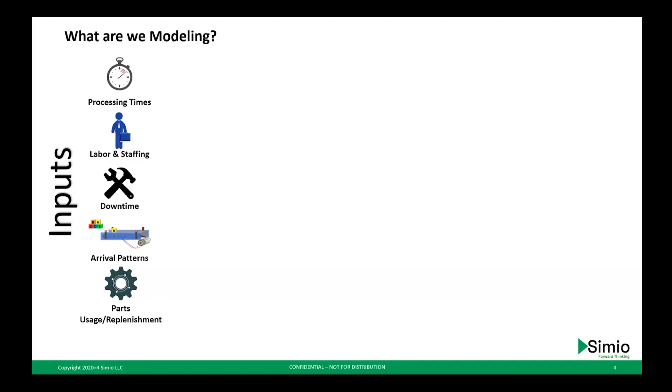And how is that demand coming into our system? We'll see the arrival patterns. We're also going to focus on processing times, and kind of the piece in between there is routing. How do these products move through the system when they get to equipment or resources? How long are their cycles?

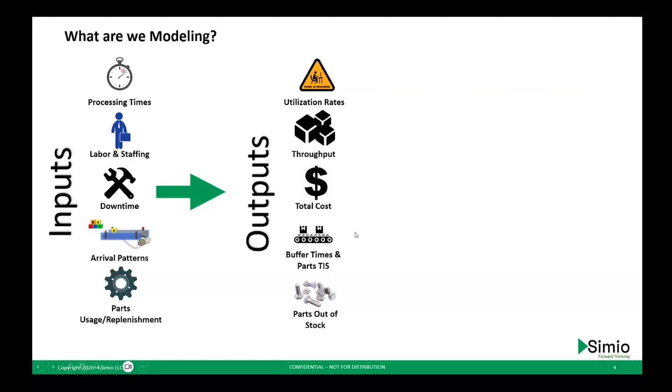Outputs. It's important to work with your stakeholders and understand what are the business KPIs that we want to measure in the model. Sometimes these can get confusing. Sometimes people will think about throughput as an input because you do have input rates of materials coming into the system, but throughput is going to be an output that we measure in the model. So how much did I make over time as finished goods or finished products? We're also going to focus on buffer times and parts, TIS or time in system, really just for some verification and validation.

In parts 2 and 3, we'll focus more on the analytical aspects of simulation. Then there's a validation piece in between here. We'll see that a little bit on the next slide, but this is more like trying to improve the process, using the model for experimentation, scenario comparison, and process changes to see if we can improve performance, alleviate bottlenecks, etc.

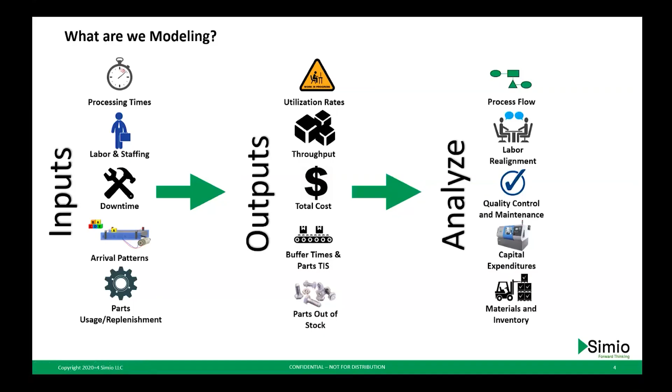From a project management standpoint, this is a recommended timeline of steps you might follow. I won't belabor this too much since I've alluded to some of it, but the first step is clearly identifying what are the business questions you hope to answer. Do you have problems with inventory, labor? These can be qualitative in nature, so you're working with stakeholders or SMEs to understand their pain points and gaps in understanding or grasp of the process.

Then we'll work toward a baseline model of the current state. Generally, unless it's a greenfield or a totally new system, you're going to model the current state. That exercise includes thinking about how much detail you need in that model, which should really be driven by the business questions.

Some of that comes with experience, but one way to think of it, and some may disagree with me, but this has been my experience doing this for about 5 or 6 years, is I tend to start with less detail and get some volume going through the model, just so I can start to gauge the result. So if I start with a pretty low amount of detail, I'm looking at throughput, and my throughput is way higher than the actual system, I've probably under-constrained my model. Then I can look at it piece by piece and think about where I left something out that in the real system is slowing us down. But starting with less detail allows you to get it built up faster and get on towards validation and decide iteratively where you might need to add details.

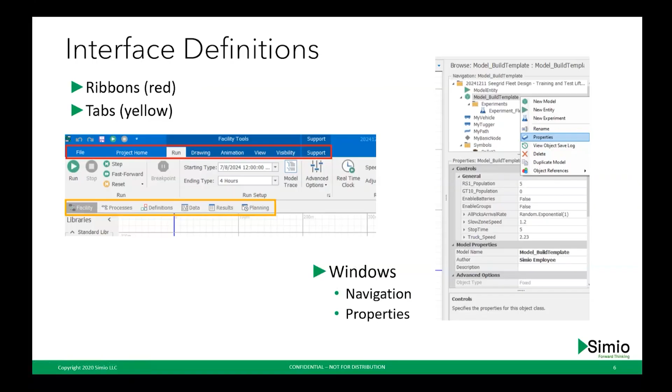So let's take a quick look here. We're now in Simio software, and you'll see exactly what I had on the slide. There are a number of ribbons across the top, and we'll introduce the functionality of some of these today, and likely all of them by the time we get through the three-part series.

We'll also work through 4 out of 5 of the tabs today. Processes will be covered in one of the follow-up sessions. Then we think about the windows on the left-hand side, my libraries. We're going to focus on the standard library of objects today, navigation window here on the right, and properties window also here on the right.

Another good habit to get into with Simio is to hover on things like the server object, or click on a property. Our developers have done a wonderful job trying to give you tool tips, a quick indication of what that thing might do, or a quick description.

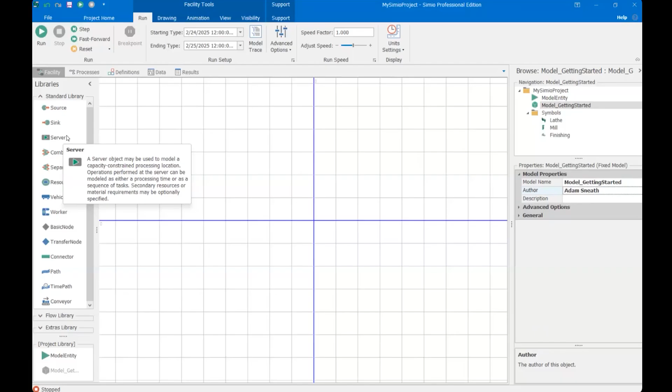So we're going to jump back quickly to the PowerPoint and set up what we're going to build here as our example. Thinking about that data gathering phase, I've created 2 examples of common inputs you might have when you're scoping this out.

So when we get started, we're first going to introduce the equipment, then we'll introduce some entities to represent our products. So let's flip back to Simio and get things started.

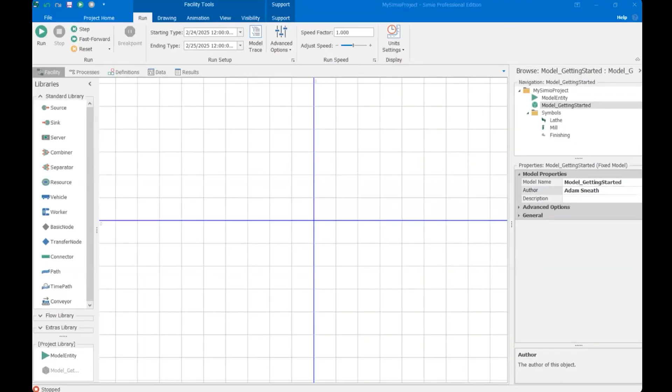The first thing I'm going to do is drag and drop 3 servers out from my standard library. Most of our model building work will be done here in the facility tab, facility grid. You can see it is a to-scale grid with meter markers, and that's really optional for you. You can model to scale if maybe you have an AGV system or a lot of worker movements that you want to capture with spatial accuracy.

What you might do in that case is, if you have a blueprint or a CAD drawing, you can actually import that. So in the drawing ribbon, you can import a floor plan, set it to scale, and build your model on top of that. It can be a really nice option if you have that available.

We're not going to do that today because you can also model and use this as more of an abstract space. There are other ways you can control how long it takes to get from A to B, other than having space and speed dictate that.

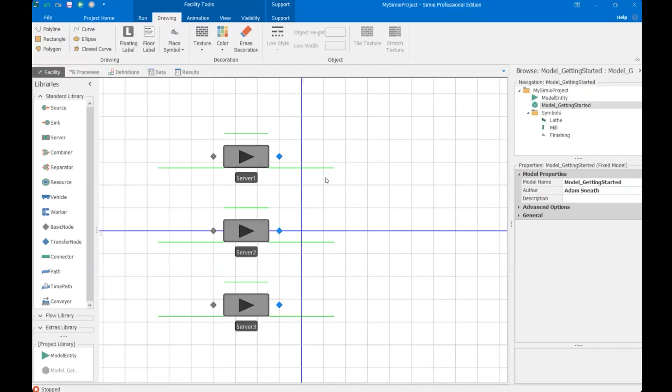So to get started, we're just going to create 1 server for each type, each flavor we have in the various departments. So we'll say turning 1, milling 1, and finishing 1. Instead of walking through everything the server does right now, we'll do that in stride, so just bear with me as we get started.

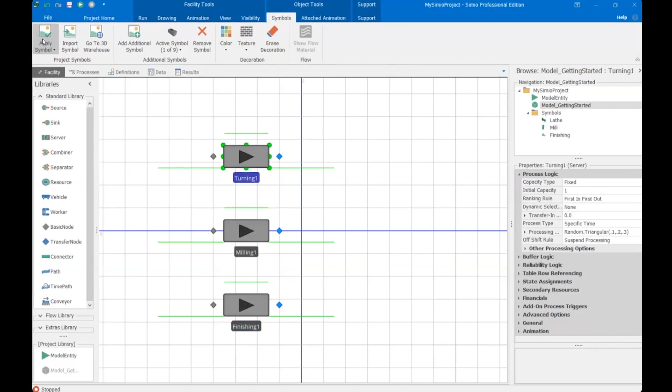But I'm also going to introduce just a bit of animation to these objects. When I'm working on a project, I go for just enough animation to help me tell a story with the model. To do that, we'll select the object, and you'll see I have ribbons that apply specifically to the selected object. So I can take a symbol from our symbol library and apply a lathe look and feel to turning, a milling machine, and then a piece of equipment for our finishing resource.

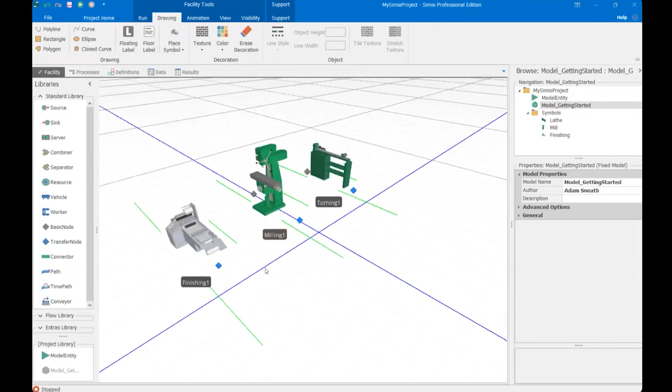Now we flip down into 3D, and you see I have a little bit of real feel on those. You can switch between 2D and 3D using the 2 and 3 keys on your keyboard. Also, if you hit H on your keyboard, you'll get some tips for navigating around the facility and moving things around, and you can hide or reveal that message with the H key.

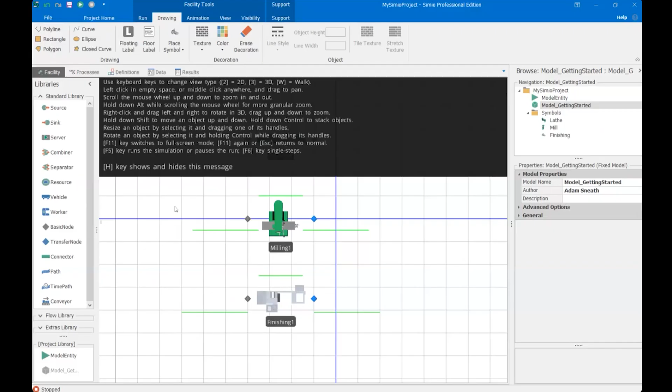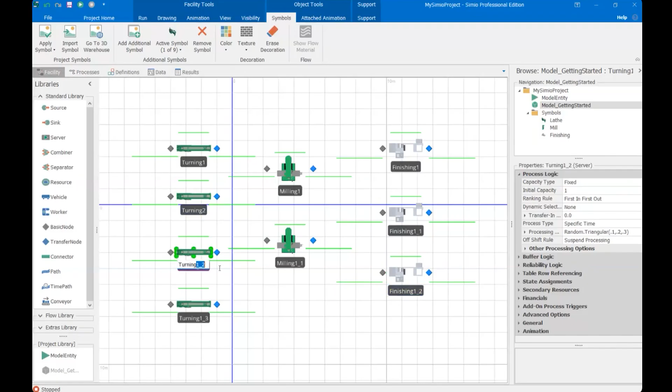All right, so now we're going to keep this really simple and just use good old copy and paste to introduce 4 turning objects, 2 milling machines, and 3 finishing resources. And just take a second to give these better names. So we'll have turning 1, 2, 3, and 4, matching our value stream map, milling 1 and 2, and finishing 1, 2, 3.

All right, so we're moving along. And we ought to also bring out a sink object. A sink object allows entities to exit the system. So sort of where the scope ends for your analysis is where you might put the sink, and we'll call this shipping.

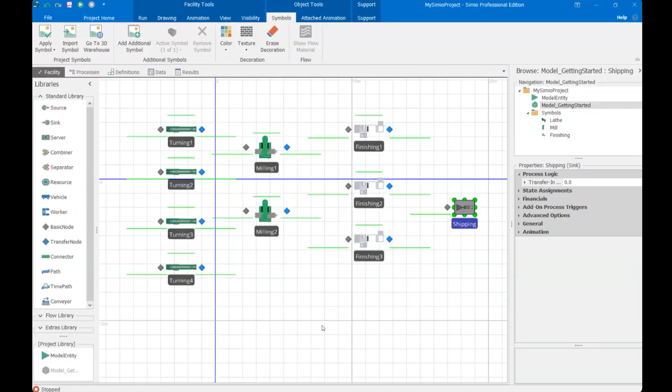Next, thinking about our products, we're going to, from the project library in the bottom left, pull out 3 entity instances. Go ahead and name these widget A, widget B, and widget C.

And we're going to give these some coloration to match the flow lines on our value streams. If I'm remembering correctly, widget B will go ahead and make blue. Similar to the objects, when I select that entity, I can interact with it here from these ribbons that appear. Widget C we'll say is orange.

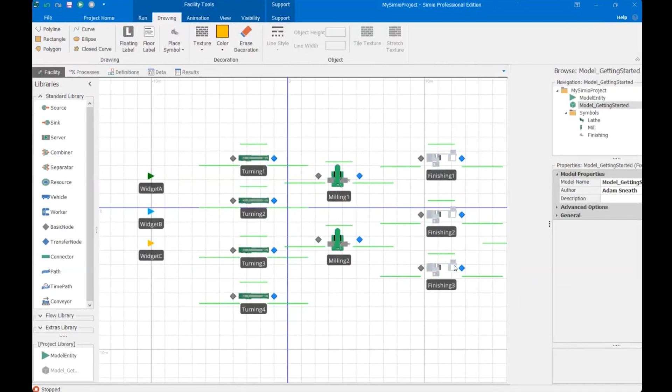Now, let's see what happens. We've made a little progress. Let's go ahead and run them on.

All right, so you can see nothing evidently is happening here in the facility view, but we can see something here in the bottom left, our simulation clock. So you have sort of 2 versions of this: one is a real valued number indicating simulated hours, and the other is a calendar time. So you can see February 24, 12:10 a.m. And what you see there is primarily controlled by your settings for starting and ending type here from the run ribbon. So for now, and we're going to adjust this, we're just running one 24-hour day from February 24 to February 25.

But we ought to make this a little bit more interesting. So let's actually introduce some entities to the system. And of course, we have an object for that. A source object may be used to generate entities of a specific type. And to get us kicked off, we will just bring out 1 source per entity type.

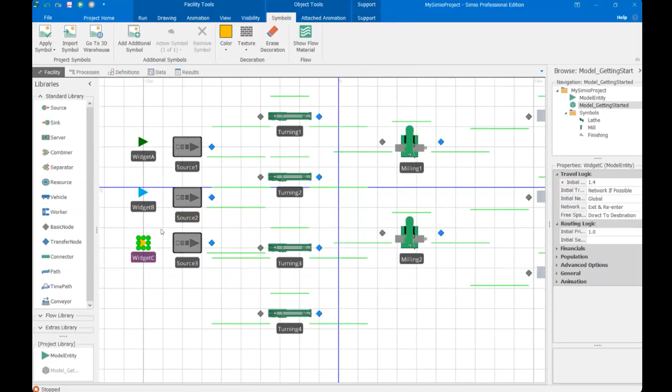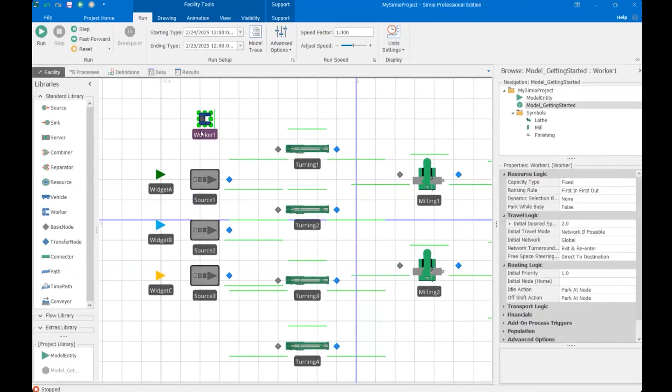Now we get a chance to introduce the properties window. So what you'll notice, and when you're getting started, don't hesitate to just kind of bring out an object and tour around its properties to get a feel. That'll give you a good indication of what the object is and how it's meant to behave, and how you can configure or customize it as the modeler.

So the source object has properties that pertain to entity creation, like how many, is there a limit, these stopping conditions? Our arrival mode, our default option there is inter-arrival time, so time between arrivals. What type of entity do I want to create from this source? So we'll make some quick adjustments here on source 2 and 3 to create the corresponding type of widget.

And we look at this inter-arrival time, random.exponential. We'll talk about this in a moment, but first note that we have time units, right? So if I simply said a quarter of a minute, every 15 seconds, I would get an entity.

Now, if you ever change a property value, so property name and value here, the value is what I added as the user, you can right click and reset. And now I've clicked into the expression editor. I'm going to pull up one of the help documents in a second just to give you a reference point on this, but Simio expressions follow this dot notation.

So if I type random dot, I see all of these distributions that I have generally in that random namespace. We're going to focus on a couple of these, like uniform, a couple common ones, triangular.

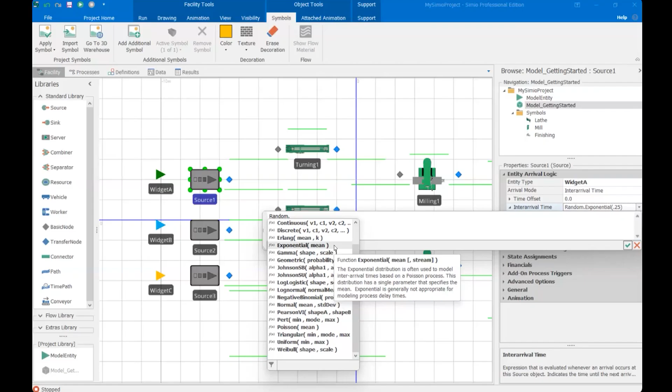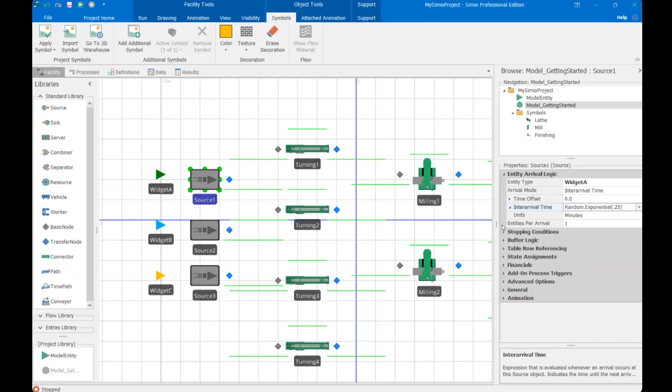But the key thing to note is that we're sampling from this distribution every time an entity is created. So its mean is a quarter of a minute, but sometimes it could be longer. The exponential distribution has kind of a tail, so it might be 2 minutes sometimes, or it might be 5 seconds sometimes. We'll see how that plays out.

So I'm just going to leave that as is for now. And now again, let's take a crack and just run the model. So you can see we've at least accomplished, we are now creating all 3 flavors of entity. But the first thing you probably notice is that our routing was very haphazard. So that's where we now kind of tee up the next step of let's actually route these parts through the system strategically, following our value stream.

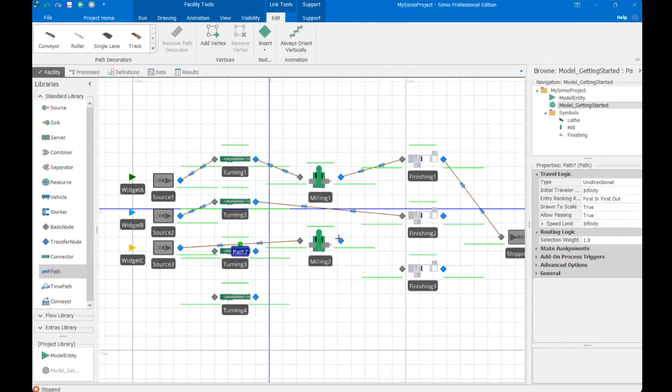So perhaps a little bit better. Now our products will follow along the paths that we've drawn, but this isn't really what we want. Given that we have resources in parallel, we want a work queue ahead of each department, and then maybe some kind of rule as to how we select resources within that department.

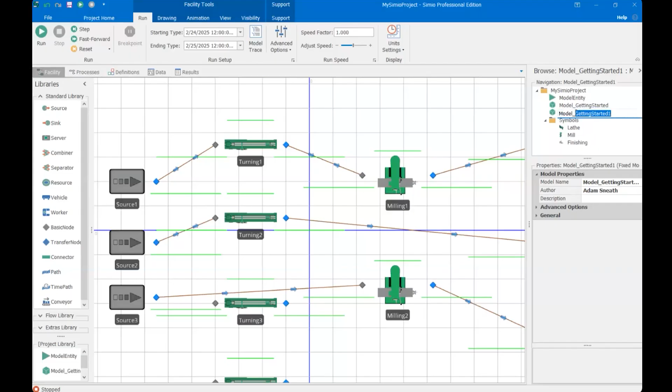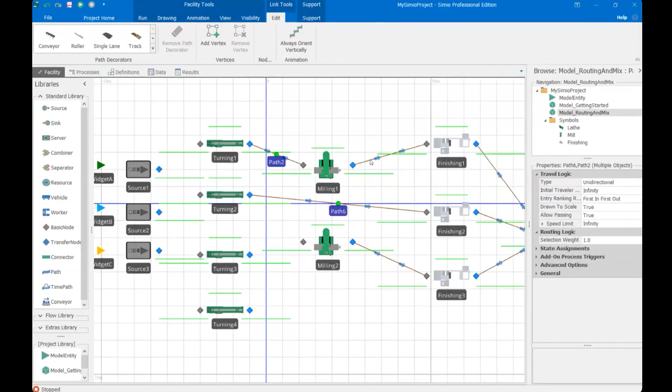So we'll take this as a win so far. Let me pause, stop the model, and I'm going to right-click the model in my navigation window and make a copy just so we preserve our first iteration. This one we'll call routing and mix. The first thing I'm going to do is undo what I just did with the paths, because we're going to introduce a couple different routing techniques in this next iteration.

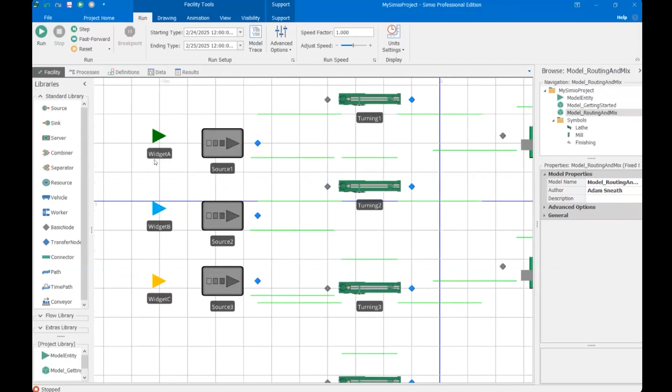If I have 100 different products, would I need to create 100 different entities? Is there an alternate way to represent all those different product types, et cetera? Yeah, certainly is. So one of the benefits of having multiple instances, like I dragged and dropped separate instances of these out, is Simio is going to capture statistics separately for each instance. Now, if you have really any more than maybe a dozen, you can use SKU codes.

So if you have SKU codes in a data table, as you create entities, you can assign them a SKU code, and then put in custom statistics, or have a record of data for each SKU code where you can track information about that bucket.

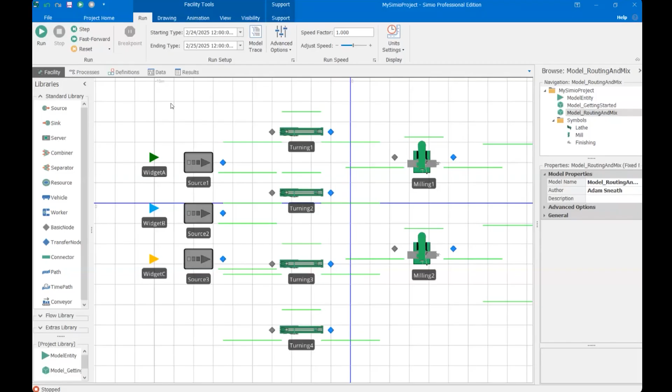So you can definitely do it with one instance type and using some SKU codes. If that's something you're facing in your project, reach out and we can take a look at setting that up, because I won't cover that specifically today, but you definitely can.

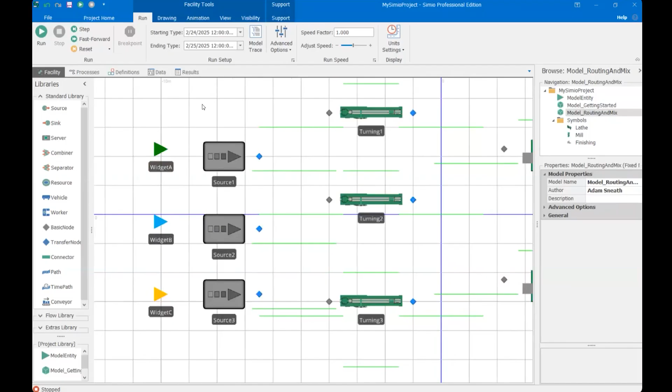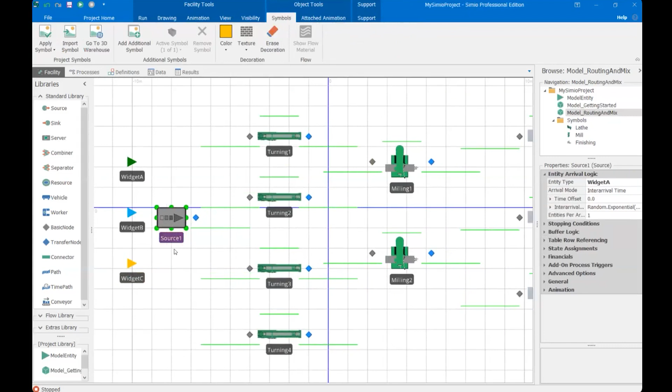So I'm going to flip to the data tab, and you'll see ribbons that now correspond to data things, like adding a table from the schema ribbon. Once I add the table, I can give it a meaningful name, like Table Products.

And I'm going to build two columns, again from the schema ribbon: an entity reference property column and a real valued column. My entity column I'll call Part Type, and my real property column I will name Mix.

Now, being an entity column, I have the option to select from the entity instances that I have in my model. And for real valued, I can enter numbers with decimal notation to introduce that mix.

Now, data-driven anything is kind of a buzzword, but when I think about data-driven modeling in Simio, it's two steps: give me the data, then use the data to drive the model. So that'll be our next step.

Another thing to note from the content ribbon is you can use these data bindings to pull data in from a handful of different sources—flat files, database, cloud sources. So if it's a small table like this, you can build the data manually here in Simio, or you can pull it in, which you would almost always do for bigger data sets.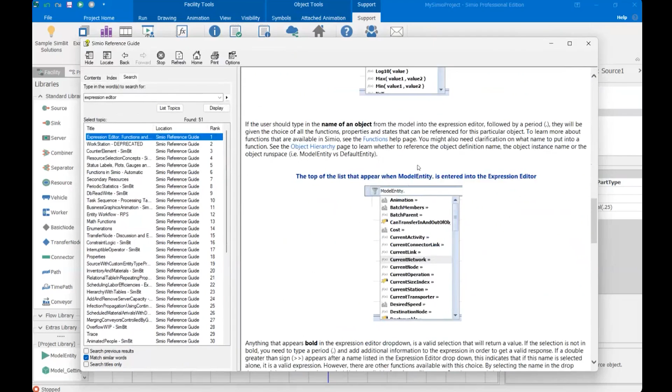A little tip is if you hit refresh, the highlighting goes away, and you can read a lot more about how that works, some of the different common functions, and so on. So definitely get comfortable using the help docs—they're really, really thorough.

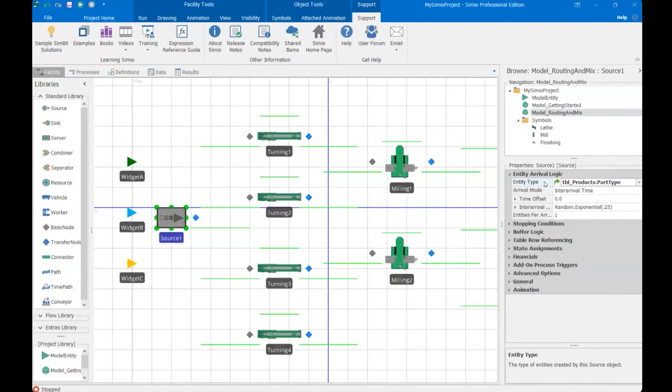But we'll see what this green arrow is telling me—I'm kind of pulling this value from somewhere else. And all I've said so far is look at this column; I haven't told it anything about a row. Now, of course, we're going to do that, but I want to just show you what happens if I run.

Cannot determine the row to use in that table, which makes sense—I didn't tell it anything about a row, and there's 3 rows there. I just pointed to a column.

So before creating entities, I can establish what's called a row reference at the source. And if I hard type a 2, now this reference can resolve what row in that column to use to get the value of entity type, right?

So I type a 2 and I get all blue parts. I type a 3, I get all orange parts.

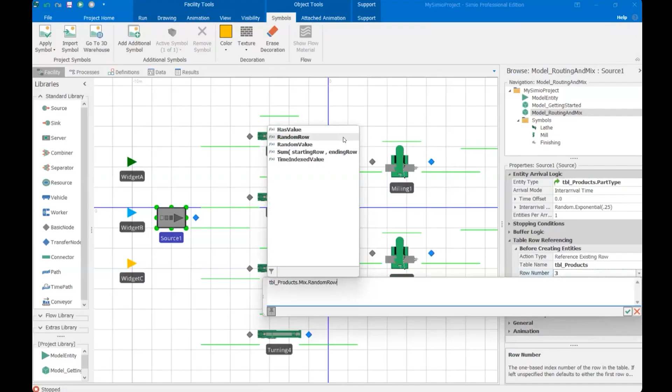Now, actually, what we want to do is sample the mix values as weights, and we have a function, one of the common functions, specifically for doing that. So I hover—it returns the index of a randomly selected row. The probability of selecting a row is determined by the values as row selection weights.

So let's put that in plain terms. What that means is the likelihood of selecting any row is its weight divided by the sum. So 0.6 over 1 is 60%. All right.

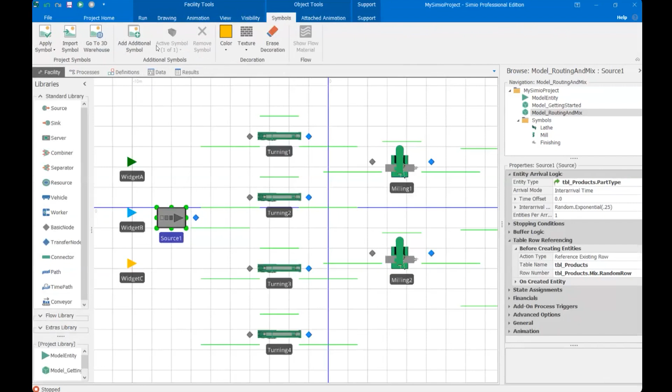So now we start to think about verification. The E in verification makes me think about errors. Every time I do something in the model, I want to check, watch it, look at the results, and make sure I modeled the behavior I was going for, not something incorrect. One of my colleagues always said you want to form an expectation before you hit run.

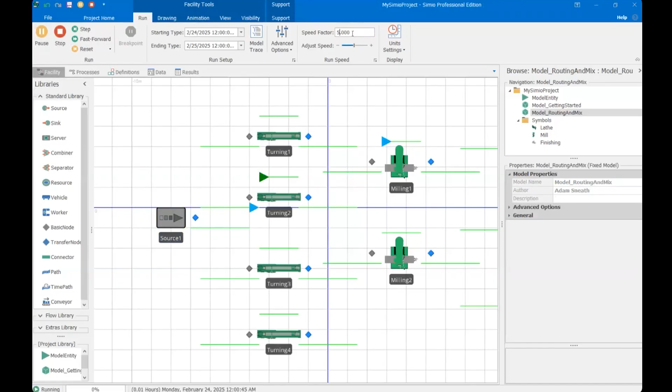So if we've done this correctly, I should see mostly green, a decent bit of blue, and occasionally some orange products in the system. And indeed we see green, blue, and every so often we get some orange.

Now we can actually do one better. It looks okay, but how do I further check that those percentage mixes have been applied? So we're going to set our ending time to 2 hours, fast forward all the way to the end, and take a cut at our pivot grid results.

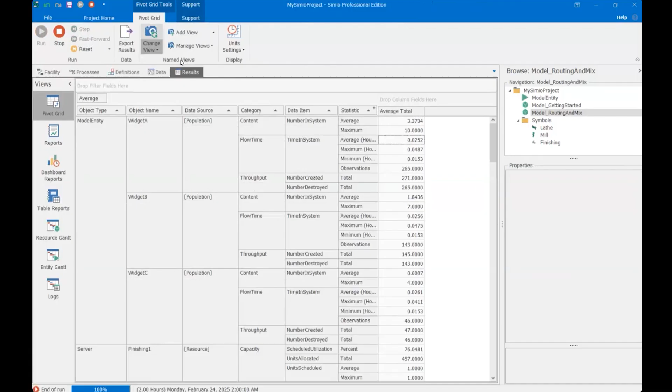I'm going to specifically narrow in on this number created option and filter down. A nice feature here in the pivot grid is you can save views, and then always reset to unfiltered or quickly snap back to a custom view.

At risk of doing the mental math wrong—oh, I already did this earlier, which will save me a little time with my formula. When we take the number created of any type divided by the total sum, we get about 59%, about 31%, about 10%. That gives us some more confidence.

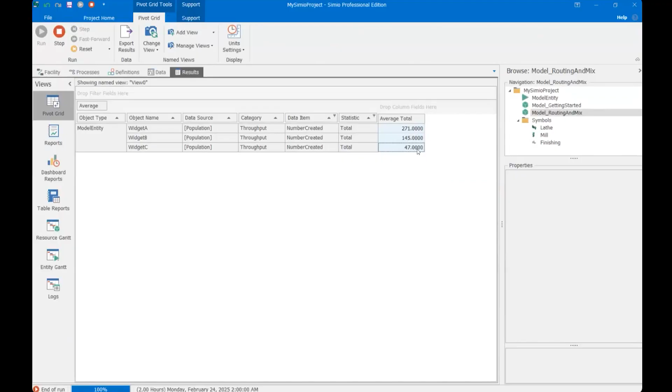This is number created of each type, showing our mix, and remember that mix is still stochastic. If we were to run a million entities through, as the number of entities increases we would trend towards exactly 60, 30, 10. But we've got enough trust now that we've incorporated that mix correctly.

Great, so making some progress. We've got the resources from our value stream, we're creating our products with the right volume. Now next we're going to spend a bit of time on routing.

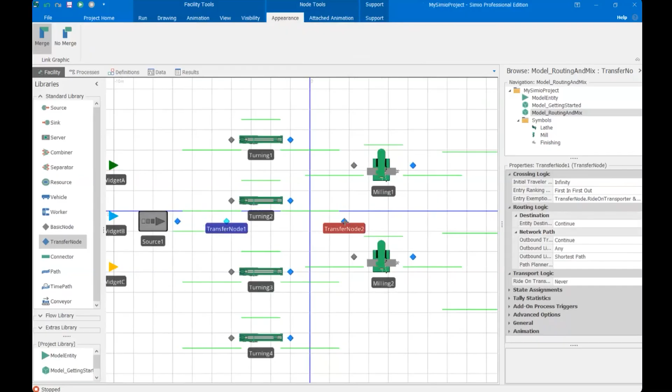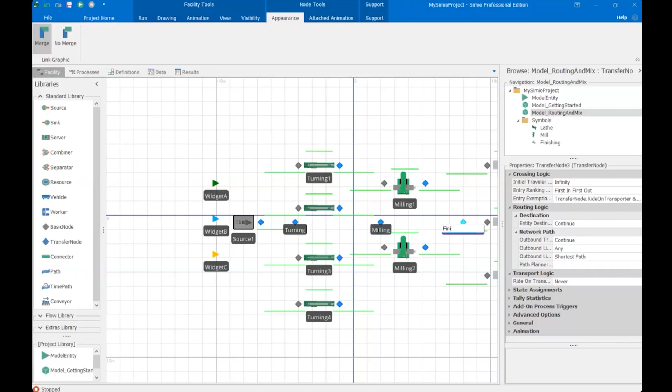What we'd really like to have is a work queue for each department. So to do that, I'm going to use a transfer node for each department, and we'll call these turning, milling, and finishing. This gives me a consolidated point before the department to get things to the various resources.

Now when I think about routing, our transfer node is sort of the window out of objects. It can also stand alone. But when I look at the properties of the transfer node, I have an entity destination type, and do I need a vehicle to take me to my destination? Those are maybe the two most common properties you'll interact with on the transfer node.

We have a list of options there. Continue is what we've seen so far—it will send you to the next closest node if you're traveling in free space. Anytime entities are just moving through the grid, not on a link, that's called free space travel. So the continue option sends you to the next closest input node.

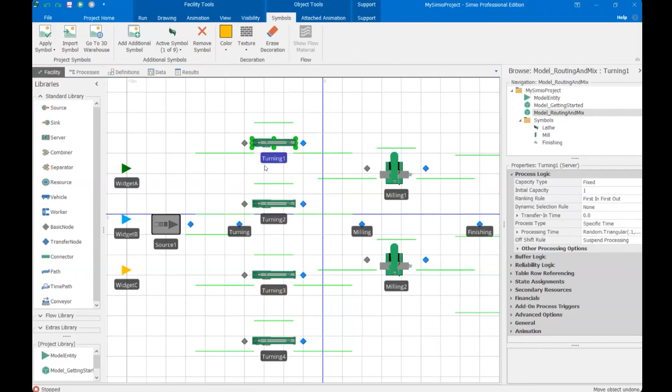If I drag this one over, you see they go here. If I drag it farther away, they just go to the next closest node. Let's see what else we have—specific would be like hard-typing one destination. We're going to focus on by sequence and select from list.

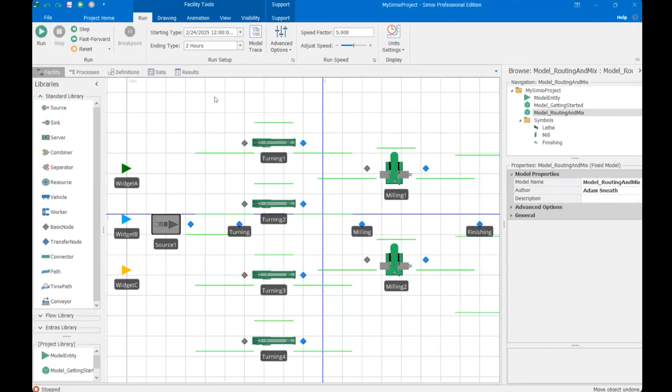So now we're thinking about that value stream map and the flow lines, and we're going to use something called a sequence table to introduce a routing for each product in our system. So back to data, schema, add sequence table—I'm going to call this table routing.

A sequence table is created with this. If you read the tooltip it tells you more: a data table that has a destination column used to specify a sequence of destinations for an entity. Sounds potentially helpful, we'll see what we can do. You'll see the options in that sequence destination type column are nodes, so I'll use this column to define a sequence of nodes that my parts are going to follow.

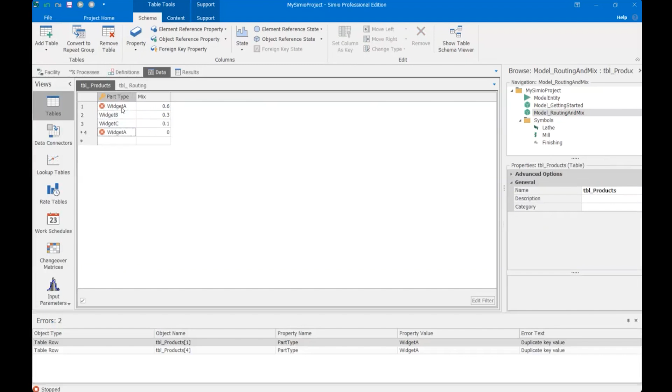One other thing I'm going to do, without elaborating too much for the sake of time, is set up my part type column as a key, a primary key column. If you have any background in database or data science, that means only unique entries are now accepted as a primary key column. Then I can have a child relationship in this table, or a foreign key relationship.

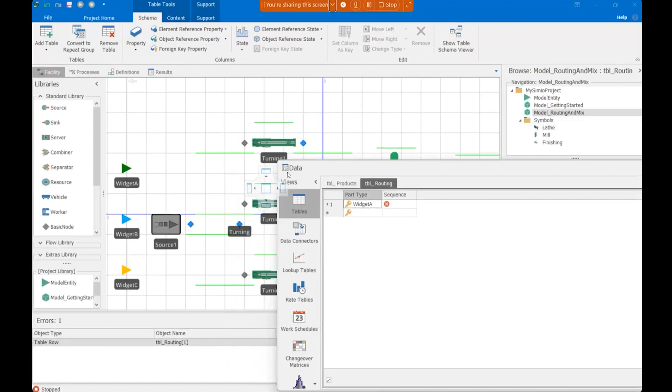So when I add a foreign key property, it asks me what my table key is. I'll select that primary key we just established, which is the only option since it's the only primary key in my model. What that allows me to do is define a routing conceptually for each type of product—so I could say widget A is going to go turning, milling, finishing, and ship. Actually, it'll be input at ship, because that's the name of the input node at shipping.

Widget B, and you can tab through these tables with your arrow keys and use copy and paste to kind of speed things up.

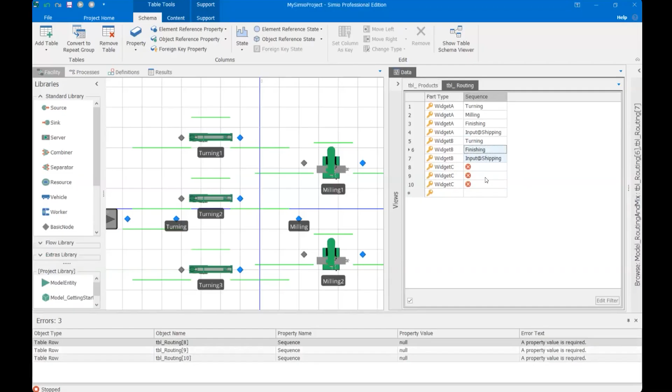I'm going to cheat and pull this up on the side. Turning and finishing is what we need for widget B: turning, finishing, ship, input at ship. And widget C is going to follow milling, finishing, and then input at ship. Let's see if we can really be lazy and copy and paste.

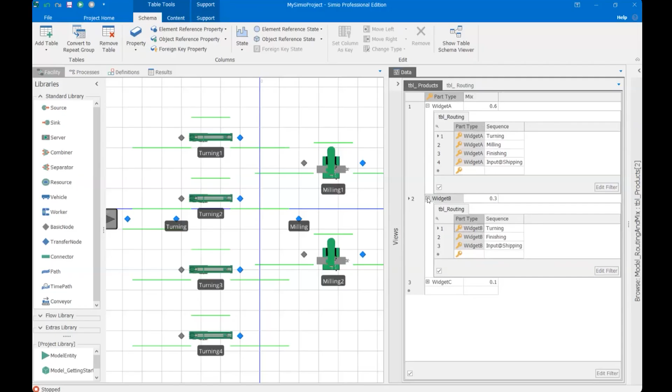You can also see it's called this master detail view through this dropdown from the primary key table. Now I have kind of a sequence defined for each type of product, just the departments for now.

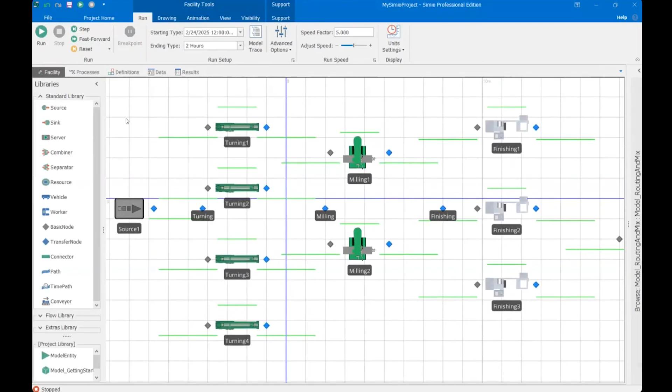All these tabs are sort of modular. If you want to put it on another monitor or put it in split screen, sometimes that can be kind of nice to manage your screen real estate.

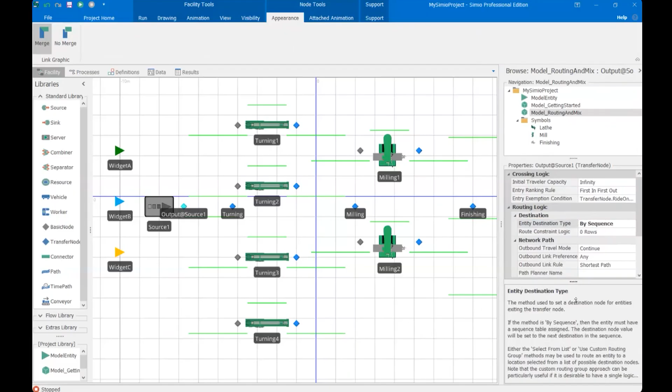Now, again, on the driven part of data driven, we're going to use that by sequence entity destination type, which is specifically meant to work with a sequence table. So again, you'll get a tooltip down here if you wanted to learn more, if you've never seen this before and you're interested in following up or building out your knowledge, SimBits would be a great place to do that.

So if I come into my SimBit library and type sequence table, we actually have a category dedicated to that. There's a handful of SimBits. When you click this, it'll open a model and a PDF. It's kind of a small targeted model on a specific concept, and there's hundreds of these. Really great resource for learning Simio, along with the help docs.

So we'll head back, and now I'm going to do the next step here as well, and then I'm going to explain why.

We also want that by sequence option on the output nodes of all of our equipment. At our department nodes, we're going to set up another type of routing, kind of a shortcut, or spoiler, we're going to use select from list to route to equipment within the department.

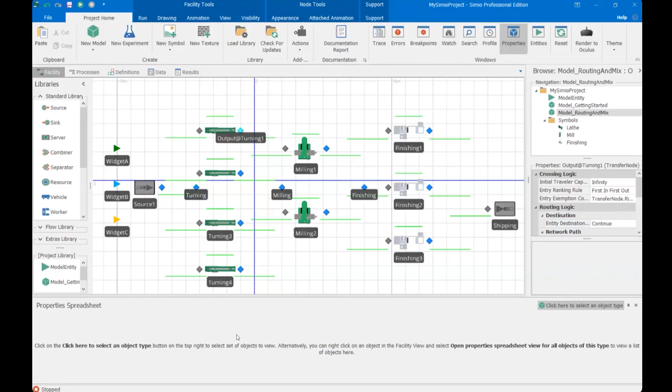But I'm going to use the properties spreadsheet from the project home ribbon to select transfer node type. That gives me this grid view of all my output nodes. Then what I can do as I select here from the properties spreadsheet, you can see it's kind of similar to that control-click for multi-select.

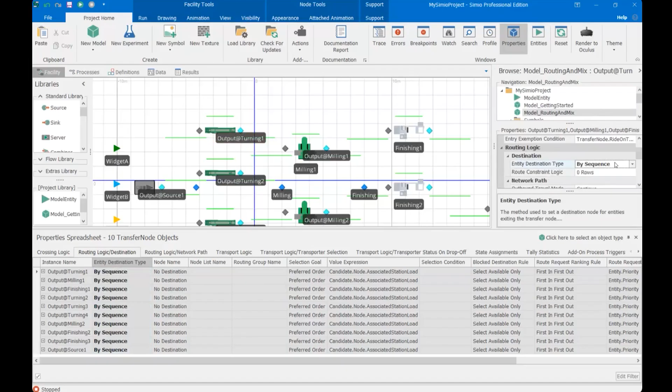Anything that I've multi-selected, I see the properties they have. So all these output nodes have the same property. I can change the value here, I can change it down here and copy and paste. But now they're all set to by sequence. And I'm going to explain to you why that's what we want to do.

The simplest way to think about this table is that every time the entity hits a node with that by sequence option, its row reference gets incremented. So it comes through the source, and let's watch it live.

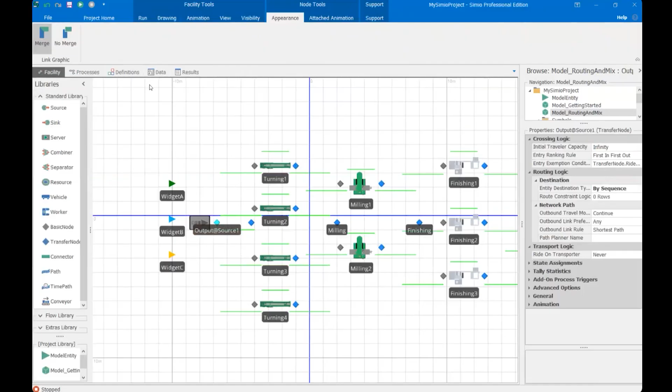So to help us, I'm going to just allow widget A, another good test of our mix column, right? And I'm using the step button to just step through.

So it actually routes through that turning node, and then the turning is just left to continue. So we're not totally done yet, right? But you can see that it hits the by sequence node there at the source, and as a result, it goes to turning, okay? Now the next by sequence node is here on the server output,

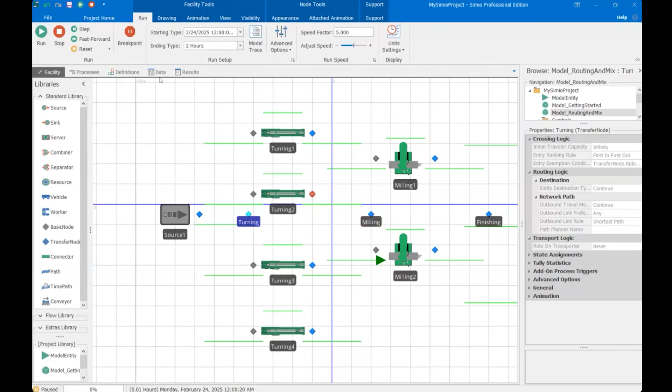and that's going to send it to milling. Happened a little bit fast because I didn't put my breakpoint on. Breakpoints are a nice way to stop the model at some point, but it sends it through to the next node in the sequence column, milling.

Now let's just do one more quick check and only turn on orange and see what happens. Forming an expectation before we run, we would expect orange to go first to milling and not go through the turning department, right? Step, step, straight to milling.

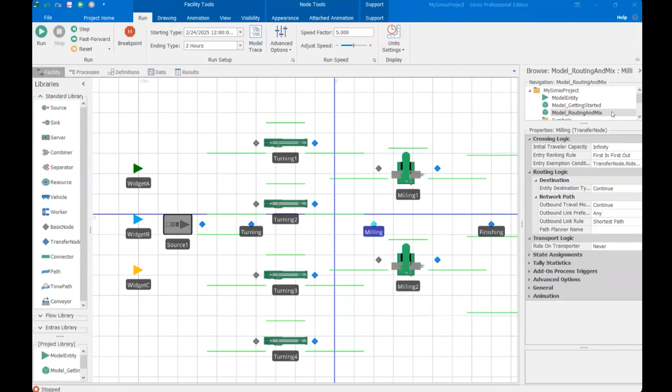Okay, so we are making good progress. Taking a quick look at my notes here. Good, okay, we're on track. So I'm going to go back to our correct mix here.

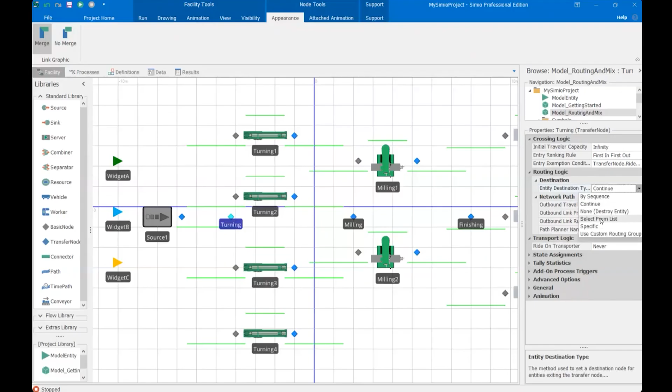To kind of round out this routing, when we go through the department node, we want to send parts to the resources within that department. So when we look at the option, select from list feels potentially right, since I want a list of multiple candidate destinations. So I make that change.

Simio asks me right away for a node list. Now, if you get an error and you double click, it'll snap you to where that is. So I know I need to create a node list. Where might I do that? Definitions, lists, node list. I'm going to call this NL Turning and select input turning 1, input turning 2, input turning 3, input turning 4. So now I have a list of those input nodes, which would be my destinations from the department queue.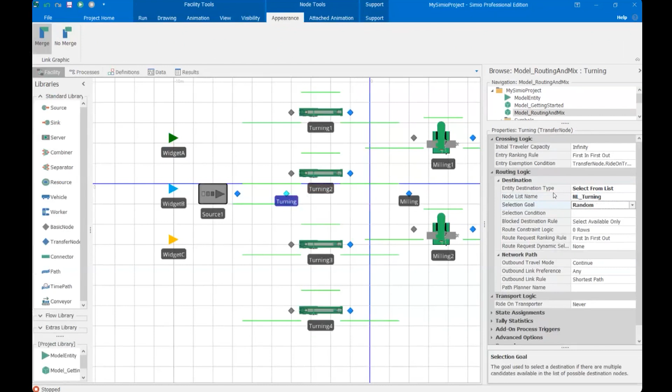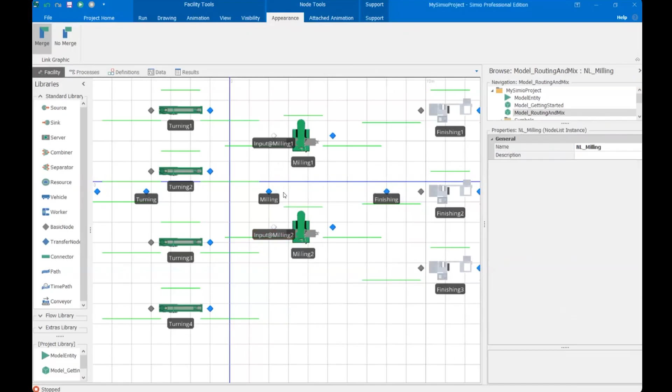And I have some great options there to control how we select a destination from that list. Now, bonus, if I control click input nodes, there's a shortcut—there's a handful of these shortcuts in Simio modeling. If I control click, then right click, I can create a node list here from the facility view. I'll call this NL Milling. I'll do the same thing for finishing, NL Finishing, and toggle the settings on our department nodes.

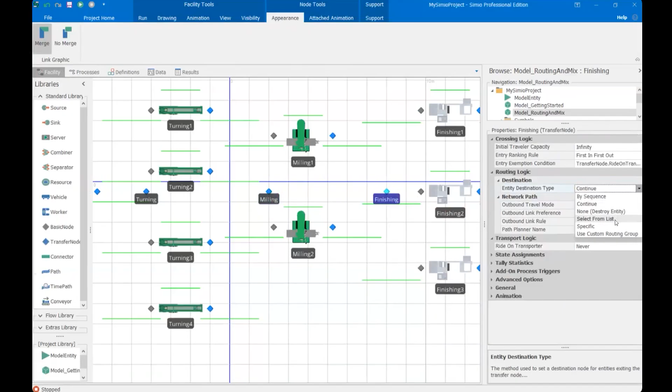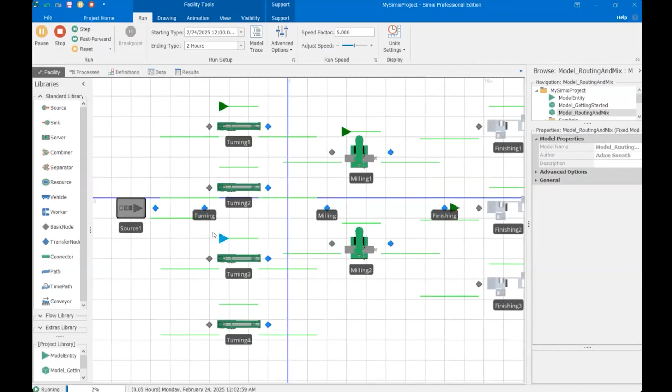Random. Select from list, finishing random. So now we have sort of a hybrid routing method where our routing data gets me to the department, and then from the department, I should navigate to one of the resources therein randomly.

Now we're watching, it looks like I'm getting green and blue on turning, a little hard to see. I think I saw an orange one go to milling. Again, there's got to be a better way to check. Are we routing things the way that we want? In fact, there is, and we're actually going to use the Gantt chart to help us with that.

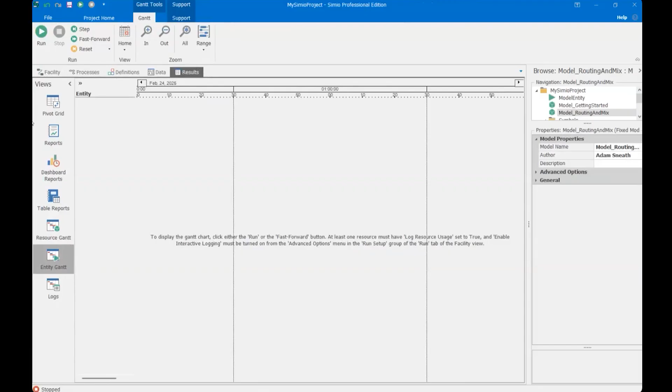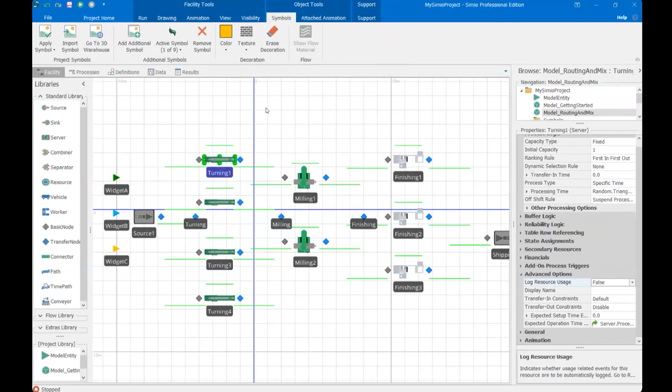So if I go to the Gantt chart, I can see a tip that I need to follow to turn it on: at least one resource must have log resource usage set to true, and enable interactive logging must be turned on from advanced options. So advanced options, we're going to turn that on. That log resource usage is an advanced options property of the server. So again, I'm going to use the properties spreadsheet to select servers, go to advanced options category, and log resource usage. Now I've got it on my clipboard, copy and paste.

Go ahead and fast forward and take a look at our entity Gantt. So now I can see pretty clearly widget A is going through resources in all three of the departments. We scroll down to B, see B is just doing turning and finishing. We scroll down to C and find it—we should see just milling and finishing specific resources in those departments.

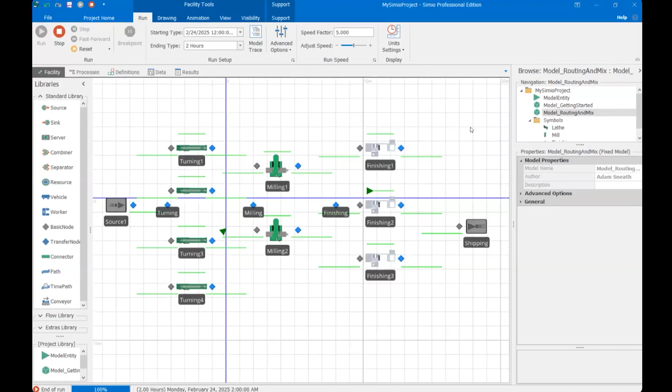All right, so I've planned a bit more, but I want to be sensitive of time. I'm just looking at the clock. So probably should prioritize answering questions if there's some out there, Dan. If not, I can continue, but what do we got?

Yeah, no, there's actually a nice little list of questions here. So let's get through some of these questions, then we'll figure out if there's more time available.

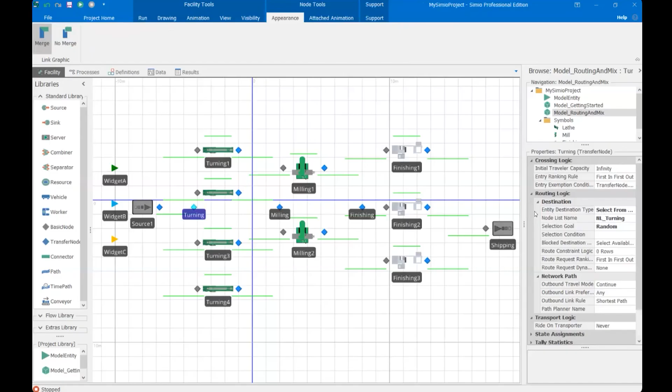So I've really focused on routing, and we've seen two key techniques. Where we'd finish this out is by adding processing times specific to products. We're running different products on the same piece of equipment, so a question that comes up a lot is how do I model different processing times for different products on the same piece of equipment. Another handy aspect of this routing table is I have a row reference for each product in time as it moves through the system. So we'd expand on this by putting in processing time specific to the part and then checking our work again on the Gantt chart.

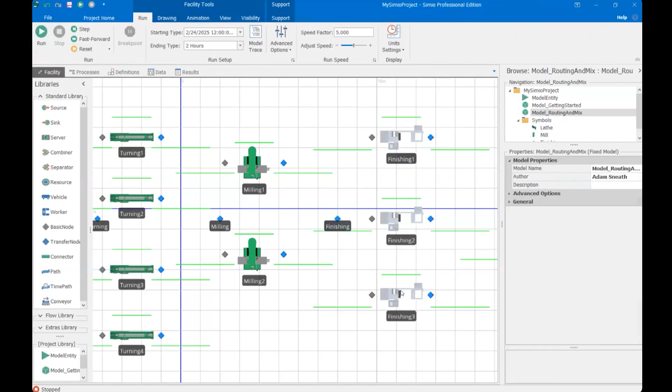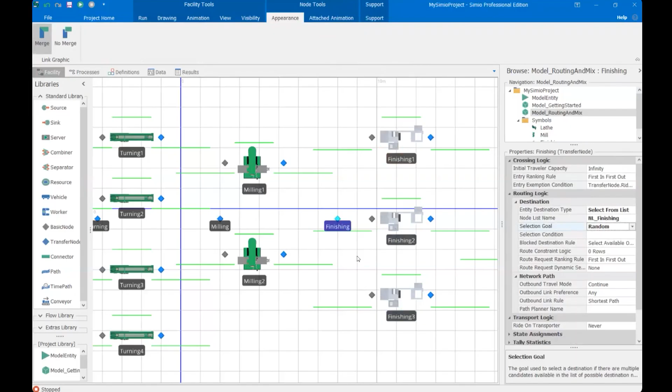Another thing we'd do next is, instead of just randomly routing, look at the queue times in the finishing area. These will have the longest processing time, so there will be some competition, and we'll see that the queues, like the number in queue, are not balanced with this random option. So we'd add a little more strategy, like checking out at the grocery store, and pick the shortest queue as a routing goal to line balance a bit. Then we'll look at the results, and we can also prioritize certain parts to jump to the front of the queue. Just wanted to give you a sense of where we're headed so it doesn't feel like such a cliffhanger, but we will build that into session 2.

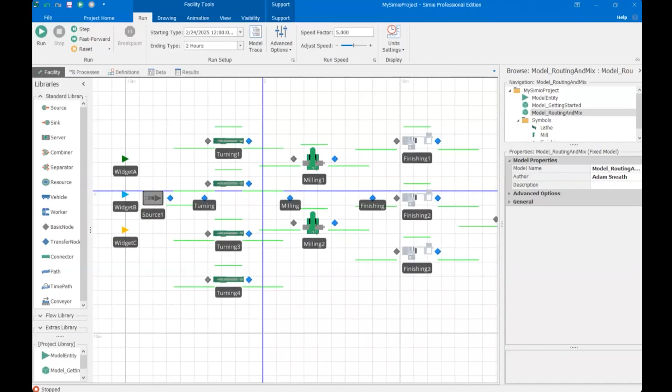How do I model defect rates? Defect rates.

I feel like we will cover that in session 2 or session 3. Process logic would be one way to do that. So the rates could be another attribute of that routing data - if you think about it, there's some fail rate or defect rate per product, per piece of equipment. You could put those percentages in the table, and then once you've finished processing at the server, we could put in some process logic to say sample that rate - if it's 5%, and it hits true, take the part out of the system, scrap it, or send it back for rework. That's one of my favorite first examples to do with process logic. So I'll take a note on that and make sure we try to incorporate it in part 2 or 3. Yep, awesome, thanks Adam.